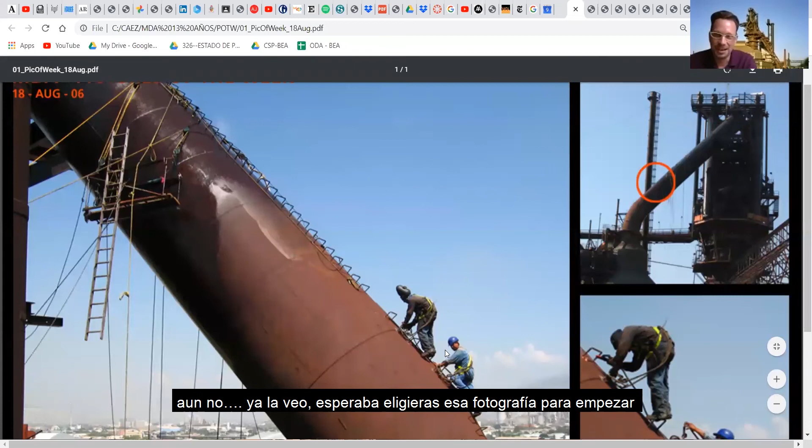So here I go. Let's start with this here. Can you see my screen there? Not yet. Yeah, there you go. I was expecting you would pull this up as the first one. Yeah, I have no plan for this, but that makes the surprise even better, right?

Do you remember this thing? Yeah, of course, right? This was early on when they started to clean the project. So right at the same time where the design that we did for the extension, for the new bits on the museum, separately had a cleaning and restoration project going to save whatever was savable from this amazing, yet unfortunately heavily deteriorated structure.

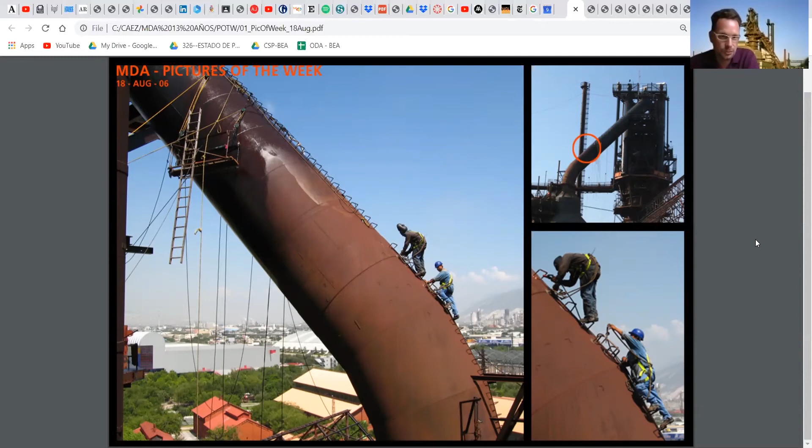And so we kept going to site regularly. And at one point we saw these quite brave men climbing up on this huge pipe that connected the blast furnace to the dust collector, from the very top of the structure going down, using the existing access ladder where not all steps were left to make their way up, probably welding on a few other ones for safe access, and then cleaning and coating the existing structure to protect it better for the years to come.

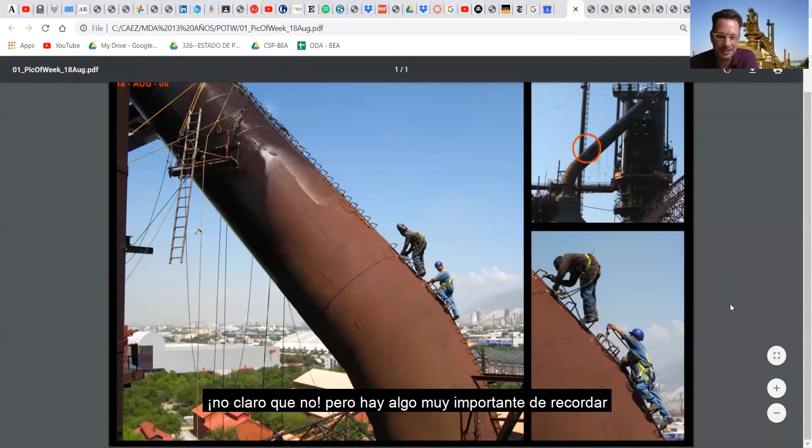Very important: none of us was as brave. No, but you were. There's something that is very important to remember, and that is that Mr. Christian here, I don't know if you lost that, but you weren't that confident on heights. Oh yeah. No, I didn't want to necessarily share this right away.

And I am going to use this tool. So if you see the yellow line here, we are at 40 meters above the ground. So even when Christian wasn't going all the way up here, we were here when this wasn't even prepared for visitors. So you're talking about how brave these guys were, and of course I completely respect that.

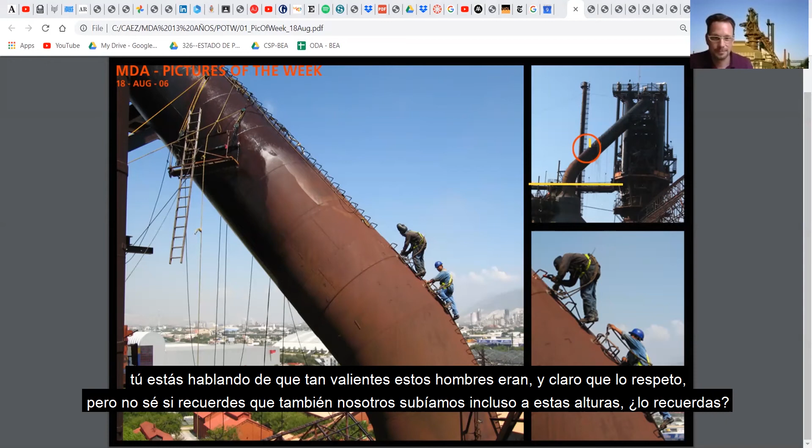But you were also a part of this. I mean, we even went to this part on the top. Do you remember? Yeah, there were steps missing on the way. Yes, and today I wouldn't do it, not at all.

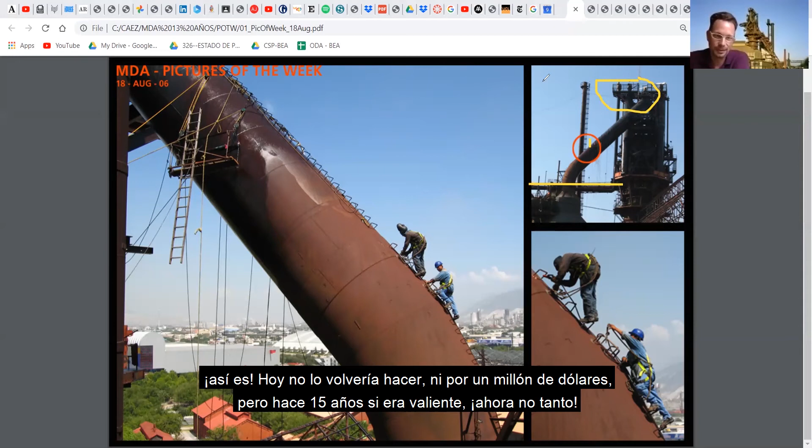For $1 million, I wouldn't do it. But 15 years ago, yeah, I was brave. Now I am not that brave anymore. There are photographs, maybe even included in here, of me doing this, and in hindsight I can't believe that I did this.

But maybe at that point we were all a bit more adventurous, and the structure had so much intrigue and mystery, but also just greatness to it. I think we all sort of felt we need to explore it. We need to make it to the very top.

Another interesting thing to notice here, if you look at the date in the image, we can see this is August of 2006. So this was just a little bit less than a year from opening day. That shows something very important to mention, that we were able to do this project in a very, very short period of time. In total, it took 2 years and 2 months. It opened in September, and we had won the commission in July.

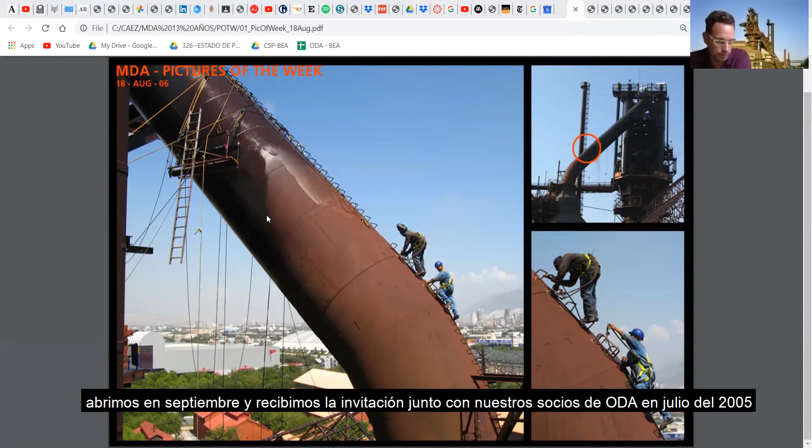Yes, and we won the commission together with you and your partners from ODA in July of 2005. And one of the first steps in construction is precisely what's shown in these pictures.

While we were detailing and developing the design, one of the first things that had to be done on site was to restore and preserve the integrity of the steel structure, but also to secure it.

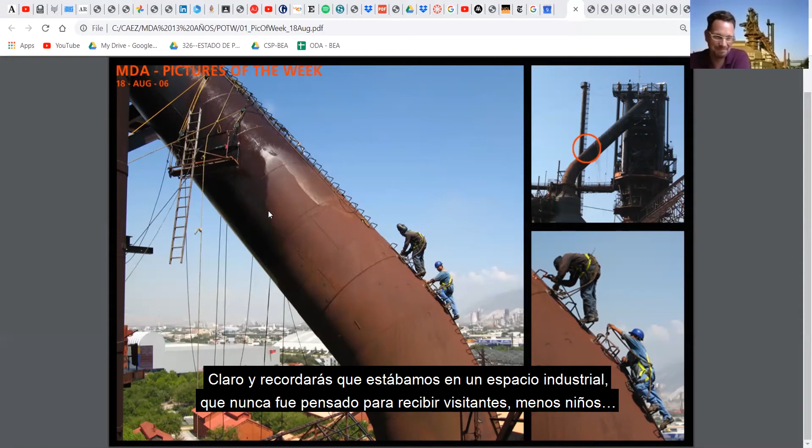Of course. You have to remember that this was an industrial installation, not intended to be visited by people or children, or crazy architects. Or crazy architects, but it happened.

You can see sort of the skeleton of the cast hall, right? So the former cladding was already taken off, even at the bottom of the main photograph.

At the beginning, when we encountered the project, the whole cladding of the cast hall was still there, but it was quite heavily deteriorated. In the beginning we thought maybe we could salvage it, take it down, and then use it again after upgrading it and adding a proper envelope, but we then learned that it was deteriorated beyond salvation.

So this all was taken off and then cleaned, and even along the way, we had to sort of change the design to adapt to the existing conditions.

I remember that at some point we had this idea that could have led to a completely different result. I guess the result is still proving to be a very good decision in terms of the system and the solution that was provided.

So I'm going to jump for the next picture. Can you see this? Yes. All right, yes.

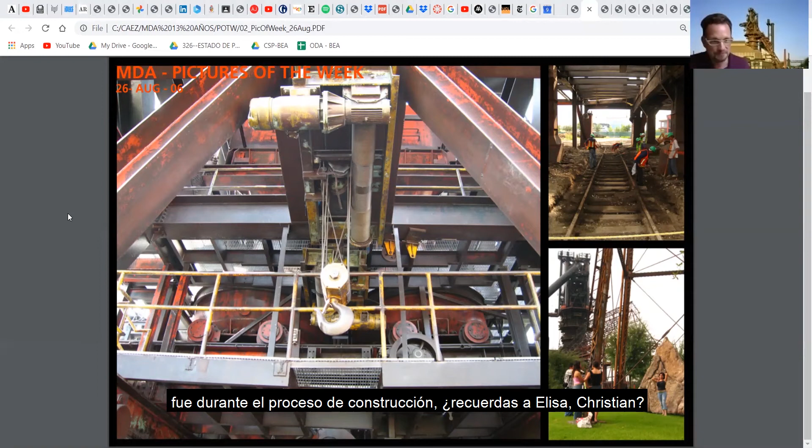Throughout the construction process, there was this — do you remember Elisa, Christian? Yeah, of course, Elisa Rubalcaba. She was, let's say, the guardian of the structure. She is a restoration architect, so her role was to provide guidance on the elements and agree with the design idea of what to do with the existing structure.

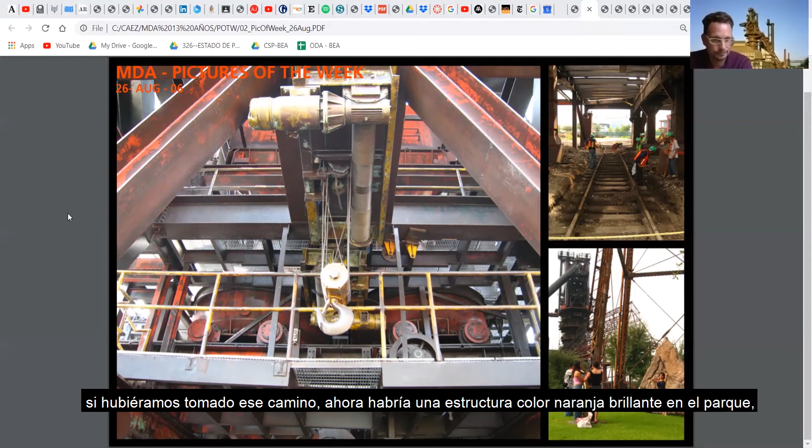That's something I always comment to the students when I take them to visit the museum — that there could have been many other ways to approach the restoration or reuse of the building. One of these approaches would have been to bring back the building to its original splendor. If we had done that, we would have a bright orange structure just sitting in the park. It definitely could have been a very different effect.

Yeah, because the original color — the photograph we are looking at is of a building with almost 20 years of operation and almost 20 years of abandonment.

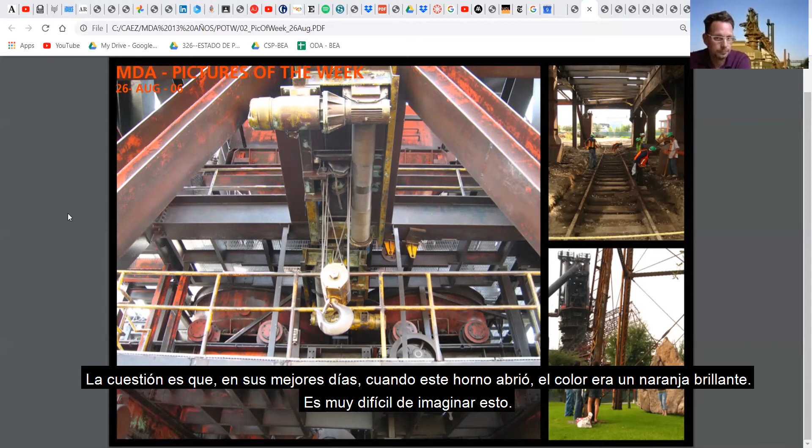But the thing is that in its best days, the day this furnace opened, it was bright orange. It's very difficult to imagine that, because there are only black and white pictures.

That brings me back to the fact that in 1968, color wasn't yet in the world, right? I mean, color was invented in the early 70s. Before that, the world was completely black and white. Well, the TV I grew up with was just black and white, so the world must have been black and white.

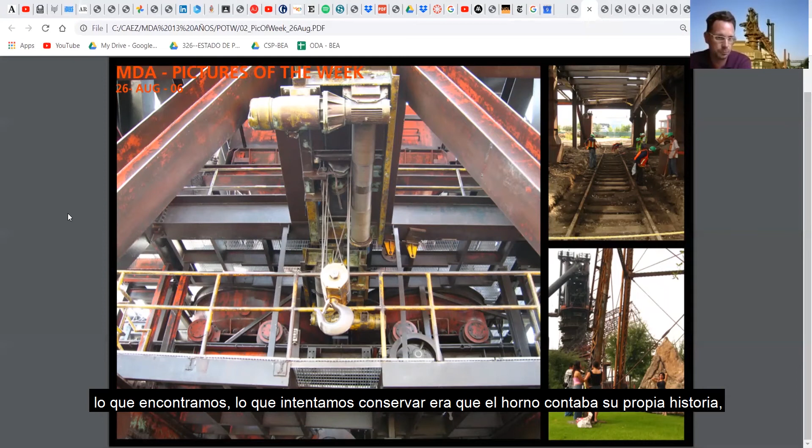But I think the path that we took, I mean if I say we, I'm not just us as the architects, but we as the project team together with the client, with Luis, with Raul, and with Elisa, took was more about preservation than restoration. What we encountered, what we found, we tried to preserve as much as possible, because it told the story of a rough industrial facility that had been 20 years in operation.

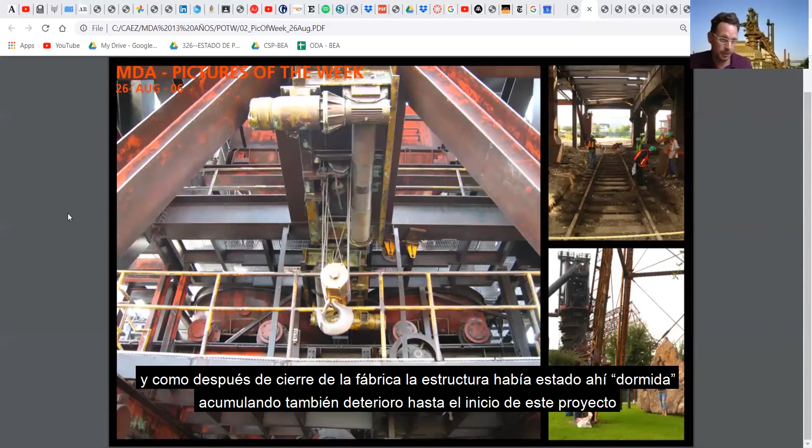During that time it had seen abuse, sheer deterioration. And then after the unfortunate closure of the steel mill, the structure was fenced off and lay dormant and deteriorated for another 20 years before this project came about. So we discovered the railroad tracks and reused that.

I think for people from Monterrey, this photograph on the bottom right is something that for us coming from New York was always a great surprise. For people in Monterrey, this is of course very common. Everyone knows this building, the park. A lot of families or parents of younger people had worked there. So though it was heavily deteriorated and had lost a lot of its initial glory, it had a very strong and fond place in the heart and minds of the people of Monterrey.

Whenever we went, we saw people there taking photographs, taking wedding photographs in front of this rusted behemoth. And this gave us a lot of inspiration, but I think also support.

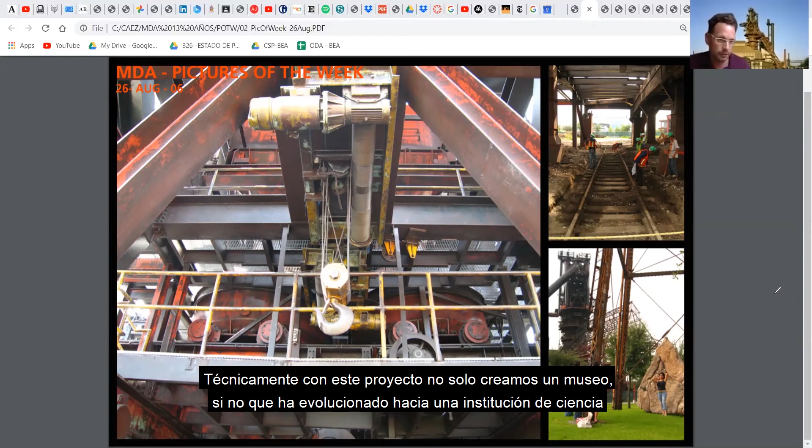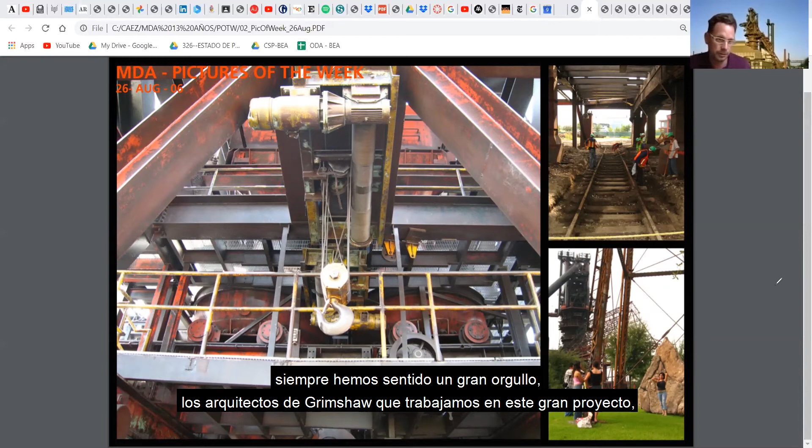To create something really unique, technically with this project, not only to create a new museum that has evolved into a science institution over this time, but to also give this back to the community, to the former steel workers and their families, the next generation, which was the lifeblood of Monterrey for such a long time, and where people that had worked there hadn't been able to go back for 20 years. That had always filled us, the architects from Grimshaw who worked on it, with great pride that we were able to participate in such a great project.

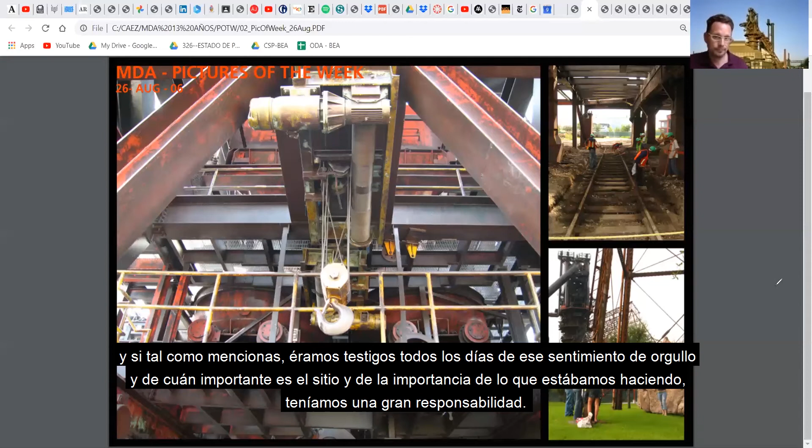As you mentioned, Christian, I think that for people from Monterrey it's a very important part of its heritage, and it's widely acknowledged as such. People are proud to visit the park, and proud to take these photographs with the building, with the industrial buildings in the background. Just as you are mentioning, we were every day witnessing how important this park is for people and what we were doing, so we felt obliged to really deliver.

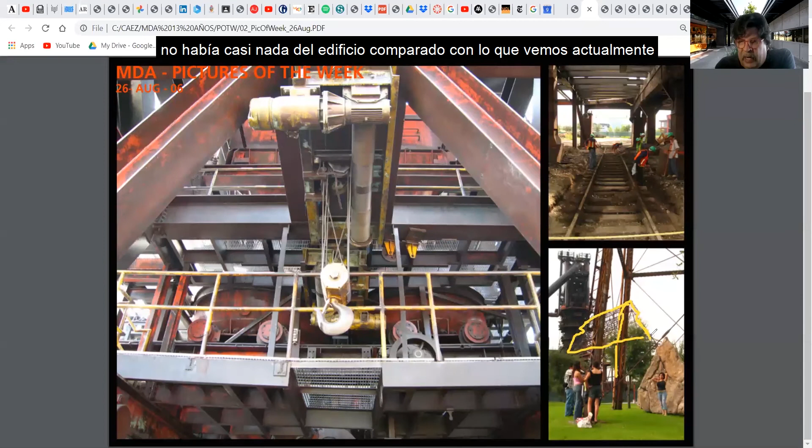Now, on the other hand, if you look at this picture, it's a very nice one, because this is what we call the cast hall, and this image is almost dematerialized. There's almost none of the presence of the building that is now there, it's very skeleton. A very interesting moment in time when this structure, which is here, wasn't still there. In order to make it, we had to make them disappear.

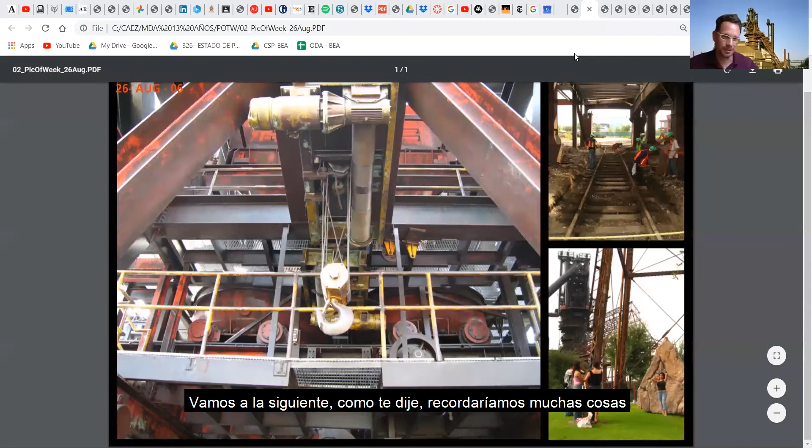Okay, I'm going to jump to the next one. I told you we were going to remember a lot of things. Oh, hello Rodrigo, is there? It's nice of you to join. Hi Christian, how are you? Very well, how are you?

Okay, Rodrigo, please introduce yourself as part of the team. Okay, in English? Everything has to be in English. We tried Japanese at the beginning. Didn't work.

I'm Rodrigo Maisterrena. I'm part of the design team for Horno 3 as part of Oficina de Arquitectura, which worked with Grimshaw from New York, with Herr Christian Hönigschmid and Carlos Estrada, and a very big team that was involved here.

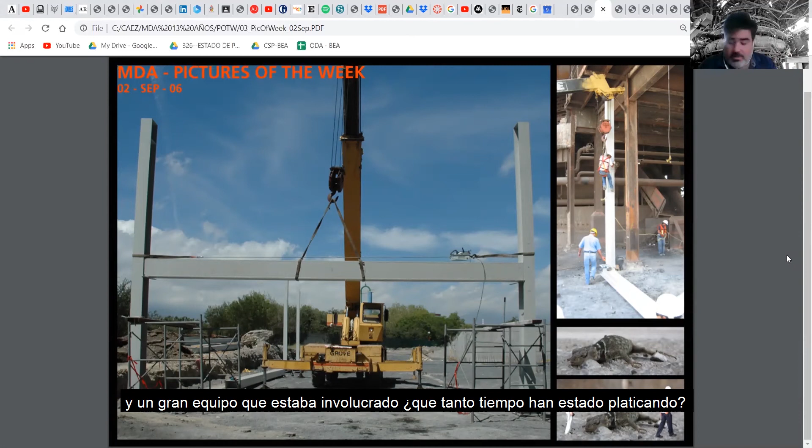Almost 15 minutes. We decided that we would just use the pictures of the week, and that the pictures would just trigger our memories. And so far it's been working very nicely, right? Yes, absolutely.

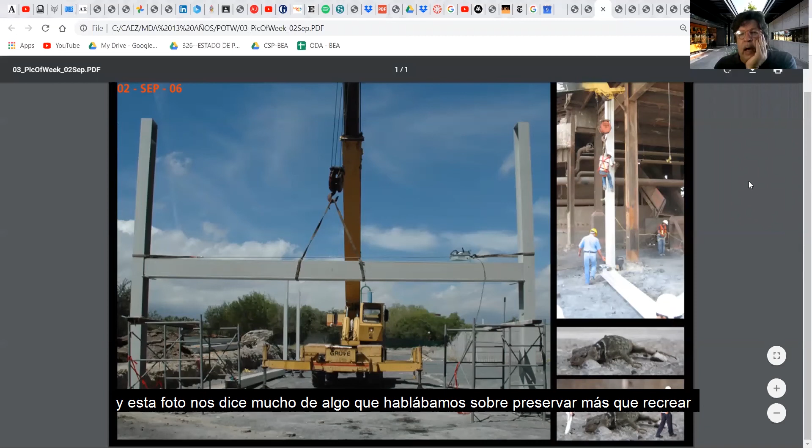So let's talk about this. I'll start with this picture on the upper right, because it tells a lot about preserving rather than restoring. This pair of columns is very important, delivering the message of what we did with the building. This is an existing column, and this is, of course, one of the columns for the new structure.

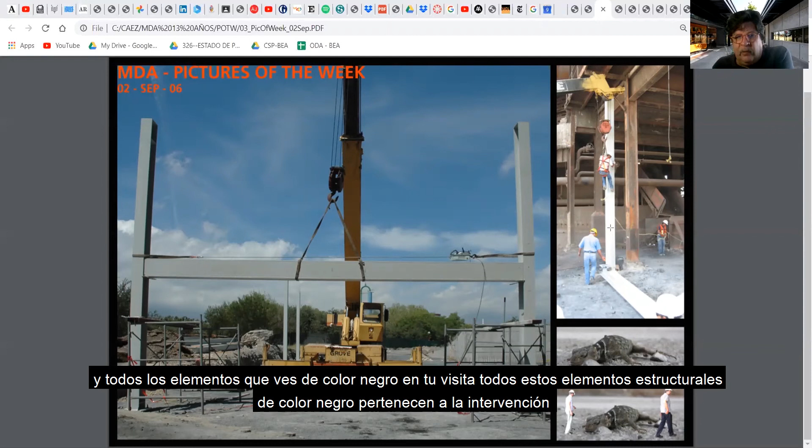And that's very important. Rodrigo and I are both professors, and we take students, at least two or four groups per semester, to the museum. For me now it's a tradition to start looking at these two columns, because this column was just installed, but in the end it was painted black. All the elements in the building which are painted black belong to the new intervention.

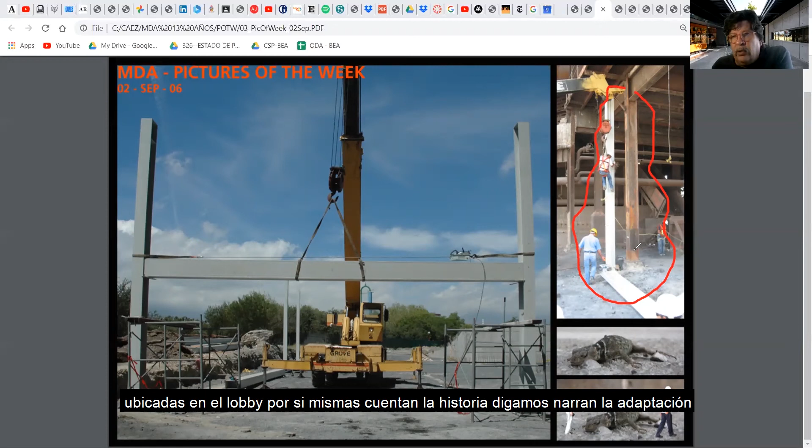So in this case, that's what we would call a happy accident, right? But these two columns in the main lobby of the building are telling the story of the intervention. It's the approach to the adaptation of the building and the respect for the existing, while making the gesture of I wouldn't say imitating, but almost repeating the structural language of the building.

So again, when all this crazy pandemic ends, please go to the building and take a look at these two columns. You'll see that this one is preserved in its orangey, deteriorated color, and this one is bright black. These two columns together, one is saying I belong to the past, and the other is saying I belong to the present and to the future.

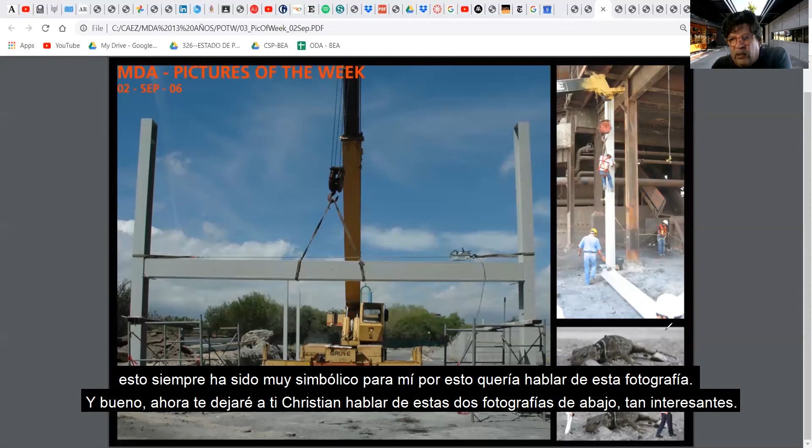That's why I wanted to talk about this picture, and I'll leave you to talk about the pictures below, Christian. These are very interesting.

Yes, as architects, I think scale is almost important, getting a sense of scale. On one of our site visits, we encountered this mysterious creature, and I thought it would be sort of humoristic, a turn on the fauna of Nuevo León, of Monterrey, to put the two of us in that picture to give a proper sense of scale of this monstrous creature that we encountered.

I was trying to feed it. I'm the person on the left, and Carlos could just not be bothered and continued with his site walk as usual. In fact, I think the person on the right is Mr. Bill Corgan. Oh, it's Bill. I thought it was you. No, it's Bill Corgan, he looked a lot fatter than myself, but that was back in the day. I don't want to be seen beside him anymore. Yeah, I was also more skinny at that point.

So Bill Corgan was the partner in charge of this project. What was his role? He is a very, very funny Englishman, and also a very brilliant architect, and it's always a pleasure to have a conversation with him.

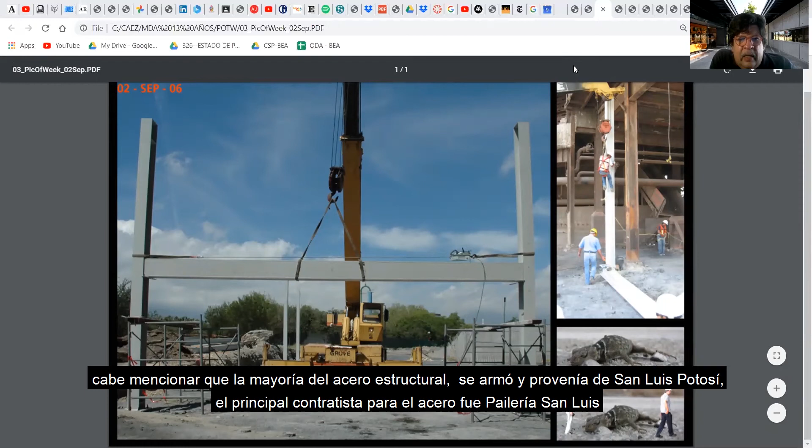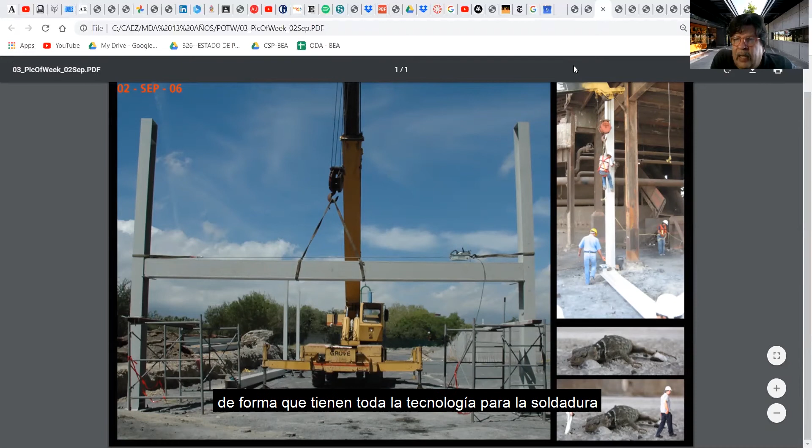Important to say that most of the steel was fabricated and brought to site from San Luis Potosí. The main contractor for the structure was Pailería San Luis, a company very well equipped for this type of job, because they are specialists in building tanks. So they have all this technology to do the welding, and in the next pictures we are going to remember some of these things, Christian.

Rodrigo, do you have anything to say about this? Not yet. Okay, very well. So I'm going to jump to the next one.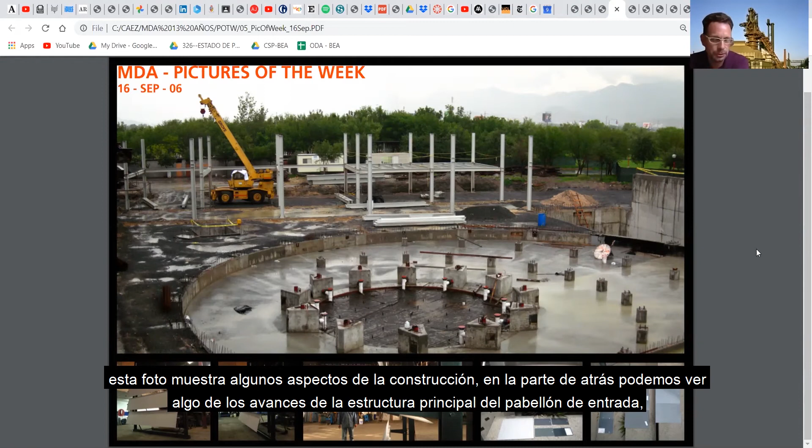This shows a few aspects of the project. In the background, we see the advancement of the steel framing of the entrance pavilion that we saw in the earlier picture - there's still the same crane continuing to erect it. In the foreground of the larger picture, we see the foundation of the steel gallery, similar to the entrance pavilion, one of the complete new buildings that we added on the west of the building, on the west of the cast hall.

You see sort of this depression there. In the end, the actual floor finish is on top, just above the top of the concrete pedestals, because we used this base underneath the floor as a plenum, through which we provided the fresh air, the ventilation for that gallery. Because we came up with a great design for the ceiling, we didn't want to put any large infrastructure, any ducts in the ceiling, so we supplied the air through the floor.

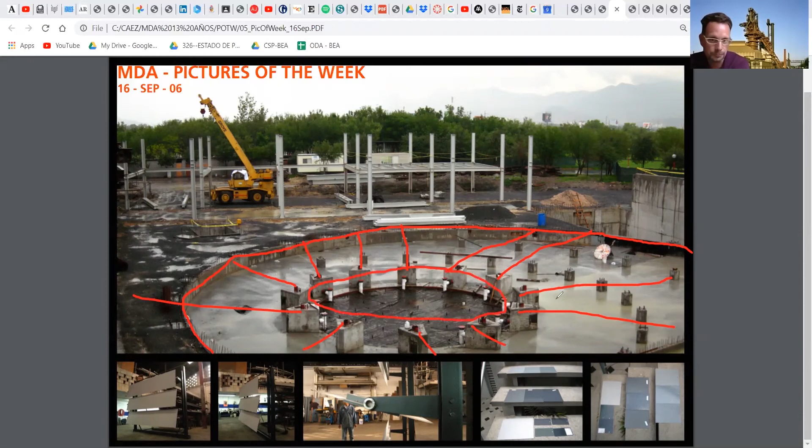You also see, at the central pedestals, white pipes sticking out. We collect the rainwater from the green roof that sits on top of the steel gallery, and we drained that through those central columns. It then went to a cistern, and it's reused on site. So already back then, we tried to implement quite a few green, let's say sustainability, design measures in the project.

In the bottom row of pictures, you see mock-ups, test installations for the cladding of the cast hall with the large panels, where we came up with the detail that allowed installation at various angles. So though in its final state these large louver panels are fixed, we created a movement across the facade by having these panels installed at slightly different angles, and over the course of the day, as the sun passes over the building, it starts to animate the facade quite nicely.

And on the right, you see a large number of color samples. The final finish was very important to us. In the background, you see one of the photographs of the completed cast hall, which has a really nice glow at sunset. This is achieved through a metallic finish on those panels, and we needed to do quite a few rounds to get exactly that color and metallic finish right.

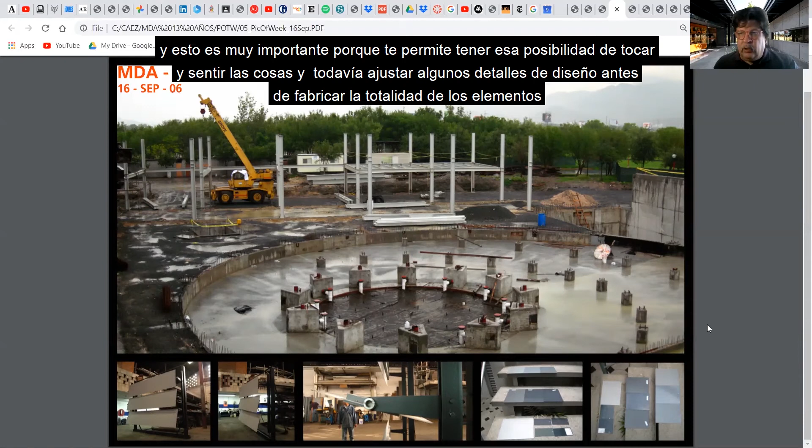In this case, I have to say that the design was very strong, and that we had a very good contractor, Hugo Schiaffino, who was the contractor for these panels as well as the yellow stair. He was very good, with a very good sensibility of detail.

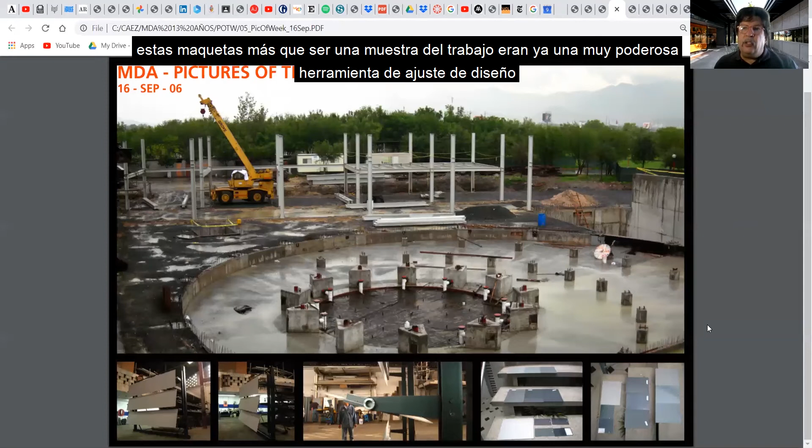So basically, when he produced these mock-ups, there was already a process of reviewing, discussing, changing, and adopting some new ideas. So these mock-ups, rather than being a sample of the work, are a very powerful design adjustment tool. I think it's very well invested money, because we could test things, test how they would perform, and not wait until they were installed. We could do this in a very controlled situation, so there were many adjustments and finer detailing that happened after we had these pieces built.

And then in the bottom right, there was... I don't think we have these photographs, but I remember that at some point we had this meeting with the construction manager about this selection of the black color for the columns. Do you remember that, Christian?

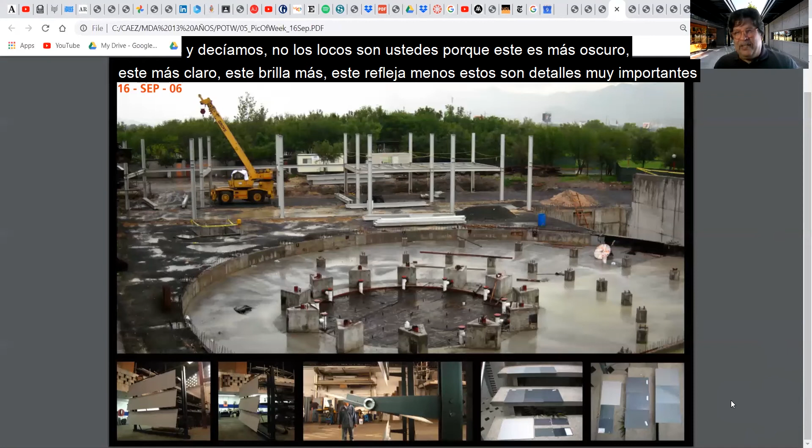So we were told from general management, guys, you are crazy, the only thing we're looking at is one black color. And we were not. You are crazy, because this is darker, this is lighter, this could be more shiny, this is less reflective. These differences are very important, and the thing was not only to have these samples, but to put them as close as we could to where they would finally be used, in order to see how they would react to the light or to the colors around them.

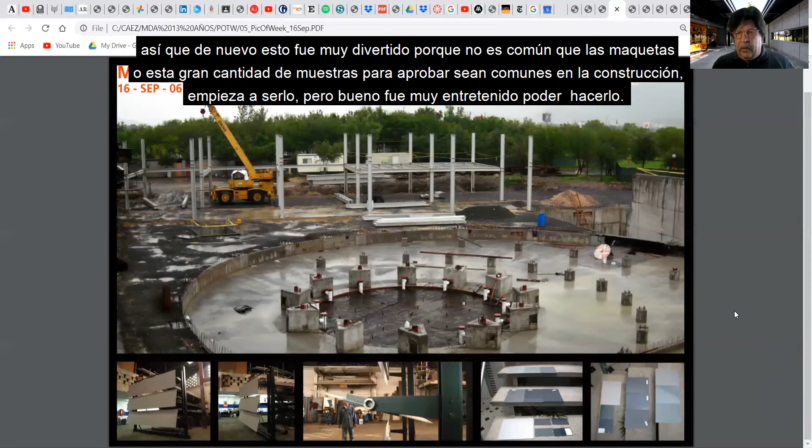So again, it was a lot of fun, because this amount of mock-ups or samples to approve isn't a very common practice in our construction industry. It's getting there, but it was a lot of fun for us.

Do you remember the RAL code of the color, Christian? No. Do you? 9011.

Okay, yes, just to add a little bit more on these pictures. On the top one, as you were mentioning, we have an elevated plenum below the floor. And I remember talking with the engineers that we didn't need any heating for this area, because since it was underground—well, not underground, we have the green roof, and it's pretty well insulated—basically in winter, the lights of the display would be enough to keep this warm, with the lights and the people.

So we didn't need any heating for this, only air conditioning for most of the time. But it was a really nice solution, something that was never done in Monterrey—I don't know about Mexico, but in Monterrey, displacement ventilation was a new thing. We had a really hard time with the local contractors trying to convince them this was the way to go. They kept telling us it would be easier, faster, and cheaper to install a conventional system, but that would involve a lot more tonnage of air conditioning, and in the long term the cost of operation would have been even bigger. So we had a long fight with that, and finally we set this, and it's been working quite well.

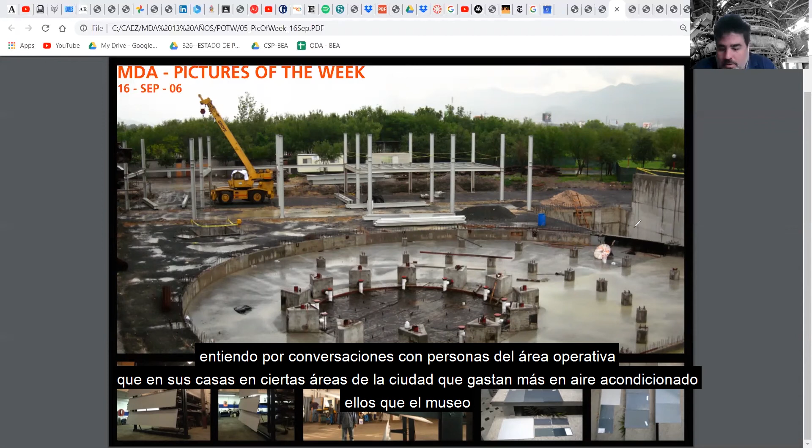I understand from conversations with people in operations that there are houses in certain areas of Monterrey that spend more energy cooling than the museum. So it's a very good system, the one that was implemented.

Just to take that note, the air conditioning equipment is sitting right here in this basement, and this opening you're looking at here is the entrance for some ducts which go like this—you don't have to take the duct all the way to the outlet. So the ducts are here, and then the whole space operates as an enclosed chamber, what we call a plenum, and there are openings on the floor from where the air conditioning just goes up. As you can see, I've become a master in drawing with annotate from Zoom.

Another note on the louvers: there was a discussion in a meeting about having those electrically operated so they could move, using the DMX system that was going to be used for the show, which could control little actuators to move the louvers. But there were around 1,300 motors that would need to be installed, plus the cabling and control, etc. So that idea lasted just about 5 minutes of discussion, and we decided we'll move those louvers manually once a year, so that they change the appearance.

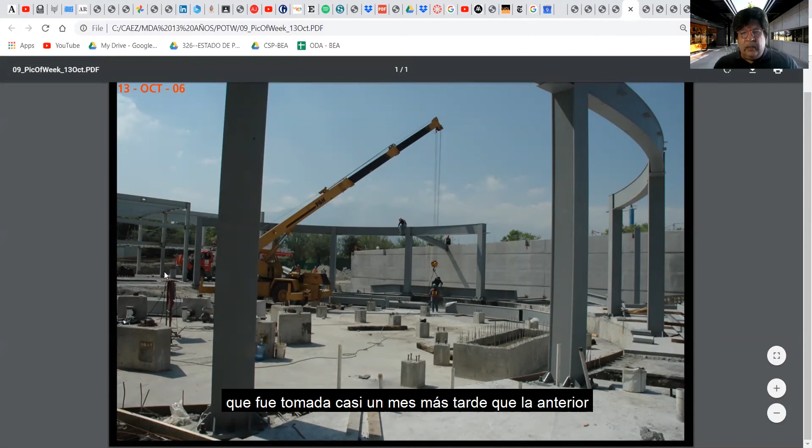This is maybe a month later than the last one, and of course they're mounting the outer ring of the roof. This is pretty much standard steel structure.

Some of the pieces you're looking at in this image are part of the exhibition inside, which we have to mention was made by Aldrich Pears, a firm from Canada who are specialists in this type of project.

We had a very good collaboration with them. I think it was a very interesting process, since we had to compromise some of the ideas they had envisioned for the visitors' experience, and we wanted the building to also be part of this visitor experience. So there were constant negotiations with them, and I guess they were also intelligent enough to understand the value of the building. Of course there were some other things we weren't really in agreement on, but we always found a way of dealing with them.

For example, this thing here - I don't know if you, Rodrigo, or Christian, remember what this is. It's for a set of rollers, on the floor, and the idea is to exhibit.

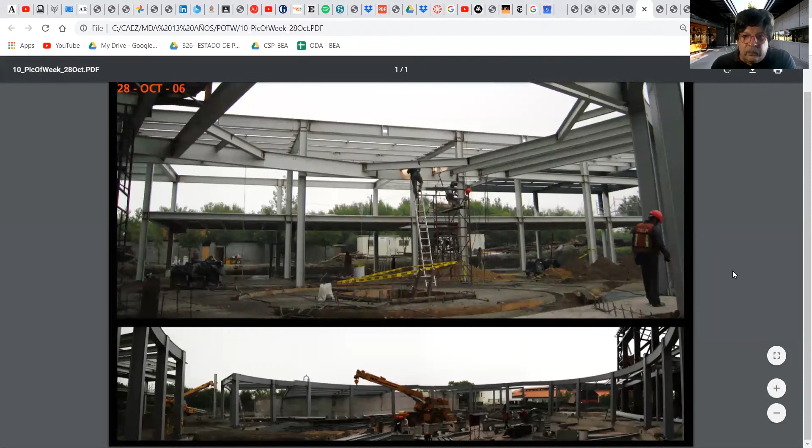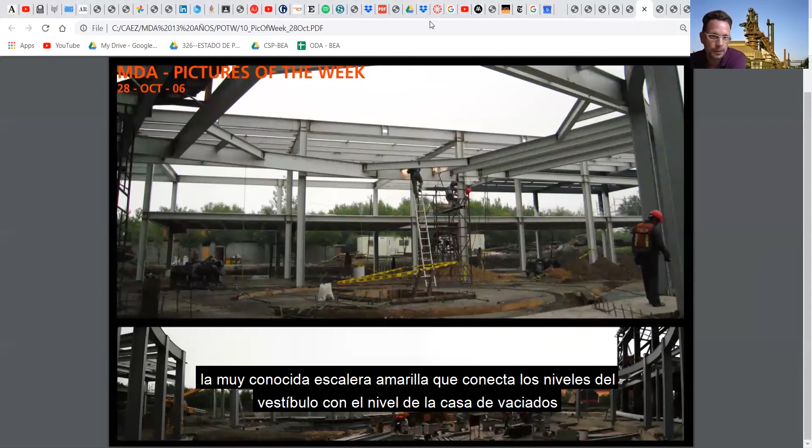It sort of looks like two circular spaces for the stair. In the upper space, eventually the stair would sit—the well-known, beloved yellow stair that connects the ground floor to the main upper floor, the level of the cast hall. The white structure is the level of the roof.

On the bottom, this is more of a panoramic shot so it's slightly distorted, showing the circular space of the already much discussed steel gallery with the plenum floor, where now almost all the steel structure is complete. Most of the steel structure in the end is hidden, and the key architectural features of the stair and the tessellated roof of the steel gallery's steel structure are not there yet. So this is still just the skeleton of the future building, of which not much in the end is visible.

Important to notice here again, take a look—this is just two weeks later than the last one. We started this conversation by saying the building, we as a team, did this project in a little bit more than 2 years, from design and construction, which meant construction was happening really, really fast, and that required a lot of attention from ourselves. It's a lot of fun, but also a lot of stress, because things are on a clock, and the clock is moving fast.

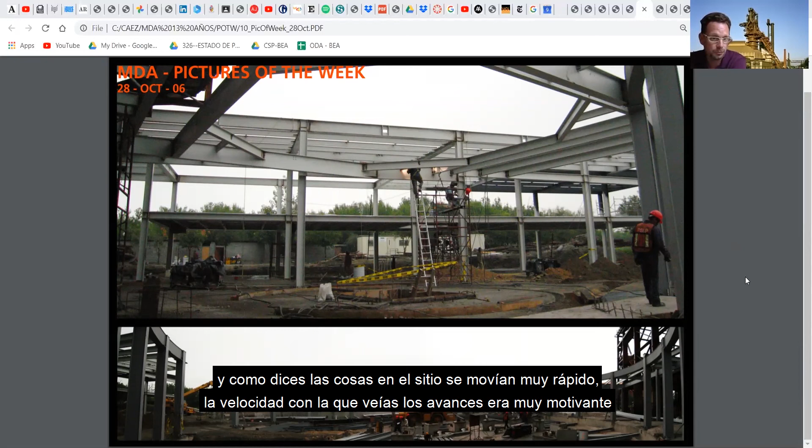I think a lot of us put a lot of love and blood and sweat in, plus of course a lot of extra hours. So I keep saying yes, this project was completed in 2 years and 2 months, but I feel like I worked 4 years on it. But I felt every day was worth it. And once it was inside, it kept moving really fast, so the progress we could see at a great pace was really, really encouraging. It was a fast track within a fast track.

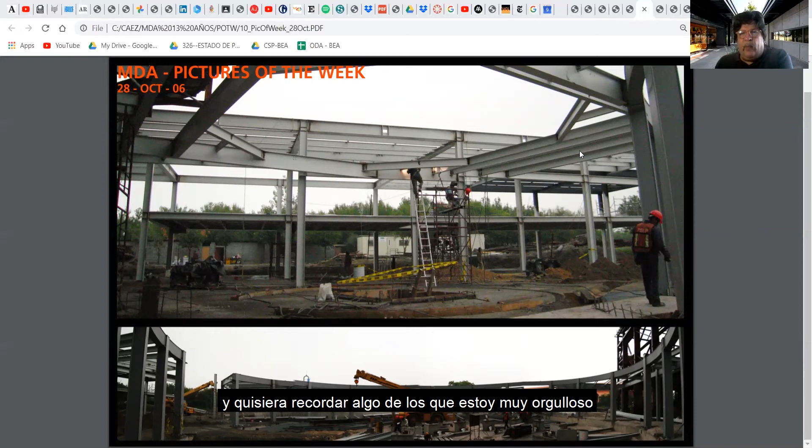Very important to notice, now that Rodrigo said you have to choose your battles—in this case, the structure we're looking at in the foreground is the very basic structure for the steel gallery, and we knew it wasn't going to be visible. We have to remember, and we're very proud of this, the building was done in a very short period of time, but it was also done on budget, which meant we didn't get crazy with crazy architectural ideas. We knew we had to invest very wisely where we wanted the nice features of the building, and elsewhere we would just use very simple and standard steel construction details and types.

I think that's one of the most important lessons for us—we had to be sure to select the right things where we could really put all the eggs, as we say here in Mexico, and then make the rest in the most economical way possible. I'm going to jump to the next one. Yes, let's look at the next one.

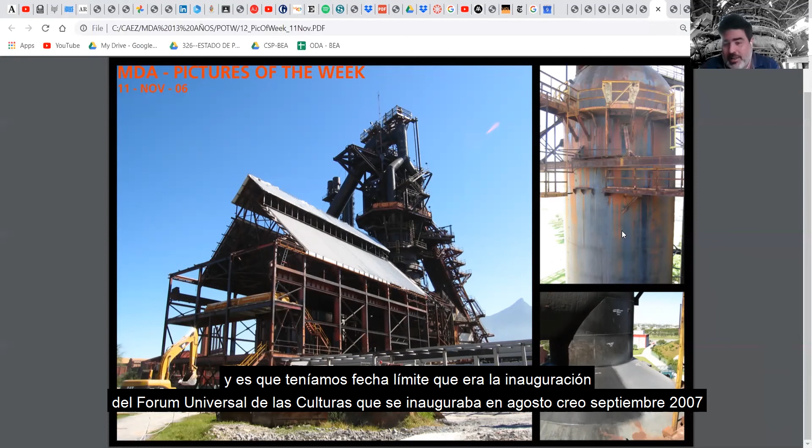I'm remembering a talk with, I believe, David Langdon, who mentioned that typically a museum takes from 4 to 6 years from conception and design to construction, at least, and we were doing all of this in 2 years. He was quite impressed with what we wanted to achieve in time, because we had a deadline before the forum—we had to finish before the forum, which was, I believe, in August or September, and we wanted to have our soft opening and training before that, so everything was running smooth for the forum.

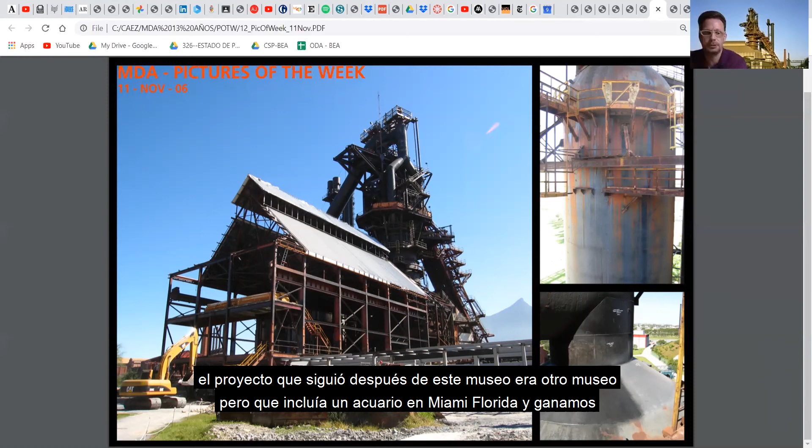Just a question, Christian—how long did it take to do the Frost aquarium you were involved with, just recently inaugurated? The project I did after this museum was another museum which also included an aquarium, this one in Miami, Florida. We won this competition a few months before our beloved Museo de Acero was completed, and we worked on this just a couple of months shy of 10 years—5 times as long as Museo de Acero. It's another scale and level of detail also on finishes, but something like this requires a lot of planning, work, and coordination.

So what we can see here is the cast hall. The skeleton, the original structure, had already been cleaned and protected—you can make out some of the original orange paint on the large columns. The new roof cladding is going in, so it's taking on again a more volumetric expression rather than the sort of naked skeleton.

On the right side, we can see one of the stoves on top, still in its original heavily deteriorated status. And on the bottom, the testing of a few coatings, might be on top of the dust collector, or one of the other smaller ones. Right, you can see the white text—we tested, I think, at least those three.

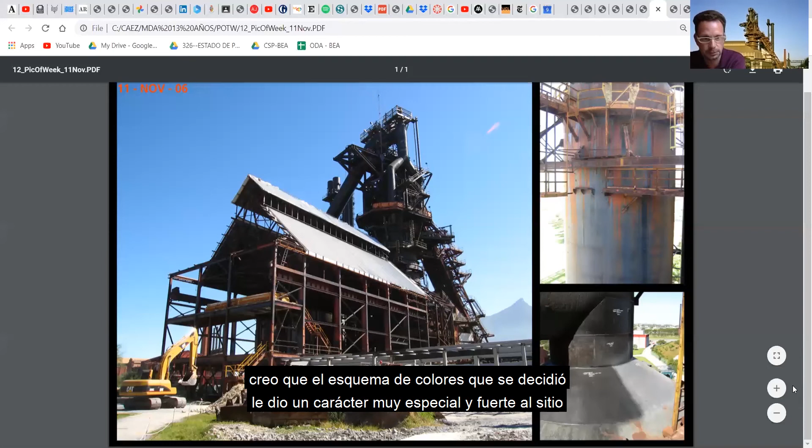You clearly see there's a strong difference between the original unprotected one and the new. But I think in the end, it was about finding a compromise—Carlos and Rodrigo mentioned compromises we agreed on with the exhibit designers, and here it was also a compromise on what product we would use. But I think the final coating we selected lent a quite strong character to the facility.

The thing is, we have witnessed that the sun here in Monterrey is unforgiving, and it just eats up whatever coating you apply. It's really aggressive and it burns—even when you have a building just recently painted, in a couple of months the sun can make it look very, very different.

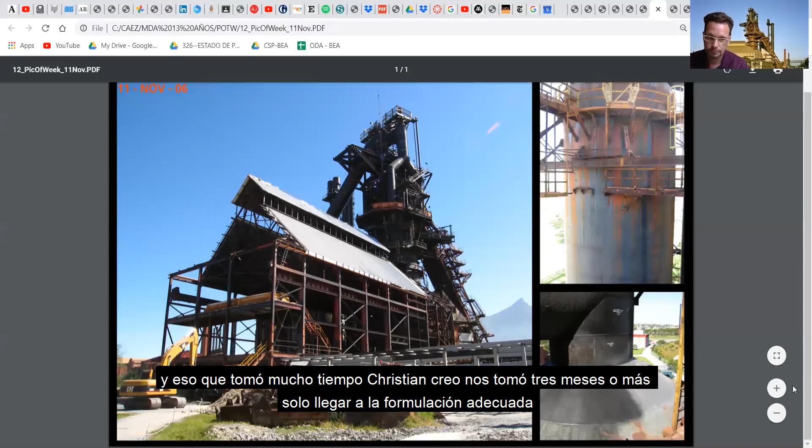I guess one of the most correct decisions we made in this project was, and it took a while, Christian—I think it took like three months or so just to get the right formulation for the finishing of the paint. And again, there were these endless conversations about why are you taking that long to select this, and we have been proven right.

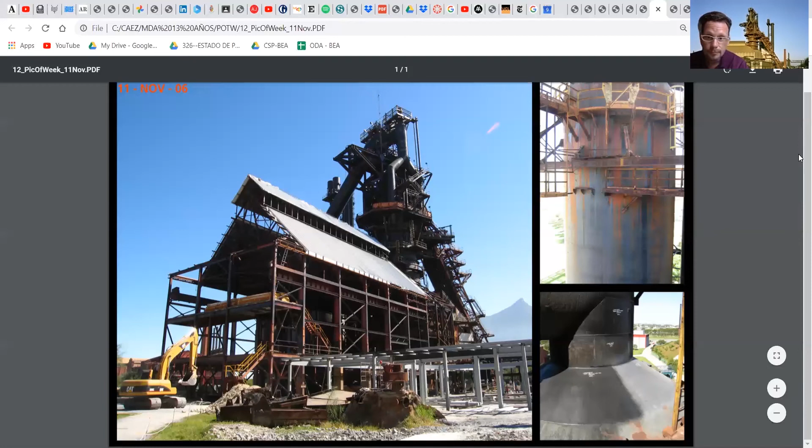I just noticed in this photograph that we can see a comet here. Can you see this? Yeah, my goodness, I wasn't aware. It's either a UFO or a comet. Just in time for Christmas. Yeah, maybe Santa.

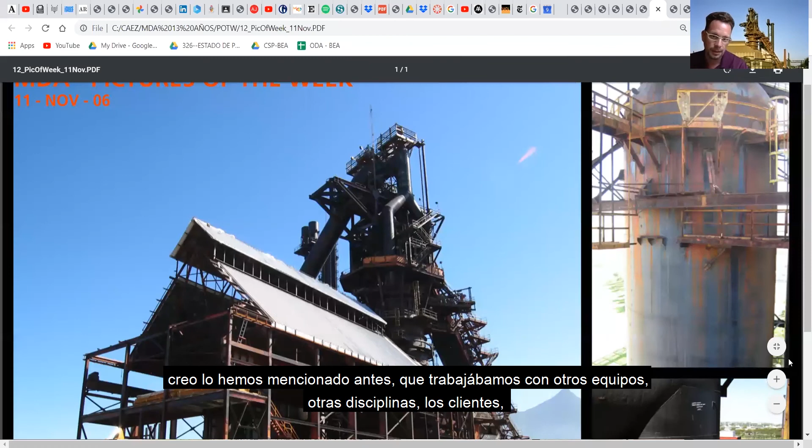We mentioned this already, that we worked with other teams, and of course we had in certain cases discussions with the client. We did not necessarily agree on everything at the beginning, but we always felt, in the long run, that the client really supported us, because we had this common goal, and they gave us the room to test out these things that, as you mentioned, in certain cases took not just a few days or weeks, but even months. But we had collectively, also with the construction manager team, planned this well, in order to have the time to test these things.

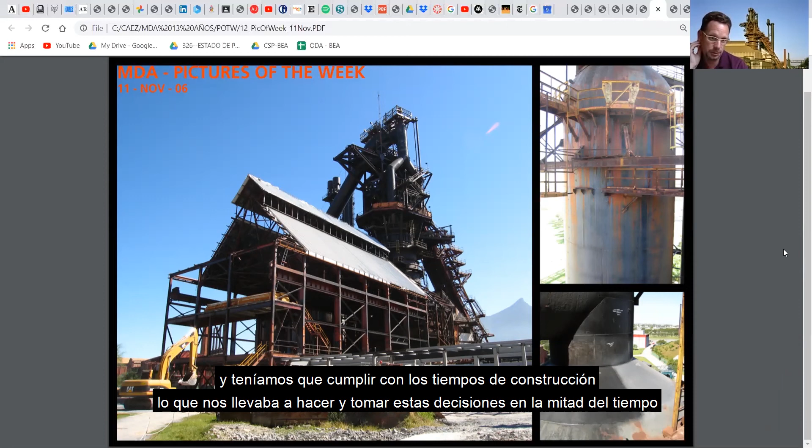Absolutely, let's move to the next one. One of the things we were testing, if you remember—this is again the entrance hall, now with its roof being put on. What you see on the left hand is the second floor of this entrance pavilion. At some point these spaces were used as classrooms, then offices, then storage.

And that leads me to this idea: these days we are living in now, where buildings must prove themselves flexible enough to adapt for change. I think one story of success for this building, Christian, is that so far it has been able to adapt to many things. Just as we were discussing before starting this recording, the institution has been alive and thriving for the last 13 years.

I guess one of the secrets for its success is that it has a building, a facility that allows for change to accommodate. And I guess in a way it's a good sign for the future, because I know hard times are coming for museums or cultural spaces that can't really move or do much about how these spaces are used.

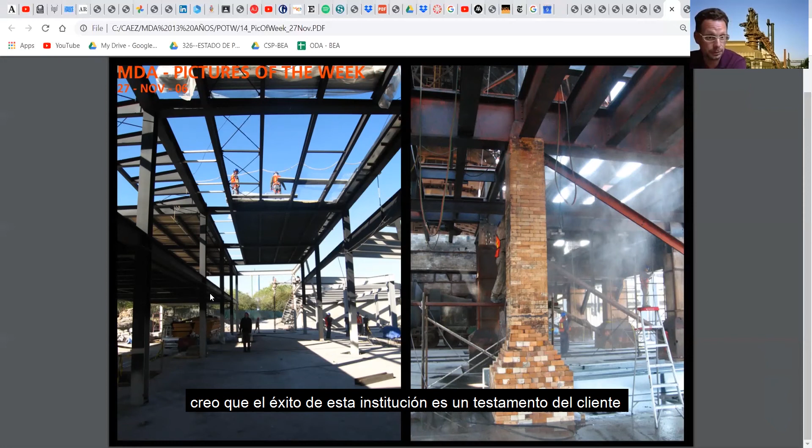I think the best projects, if designed well, provide this, if you have the right architects and engineers on it. But I think the success of the institution is also a testament to the client, to the institution, how they have been evolving, reinventing themselves, adding spaces, adding programs to the building, growing their community outreach program.

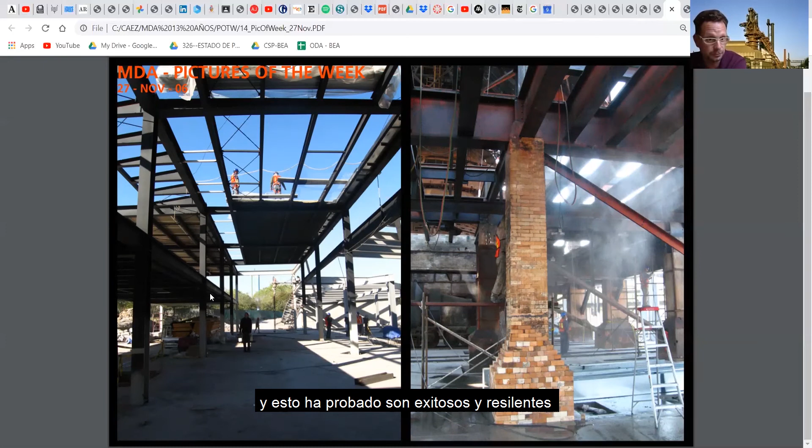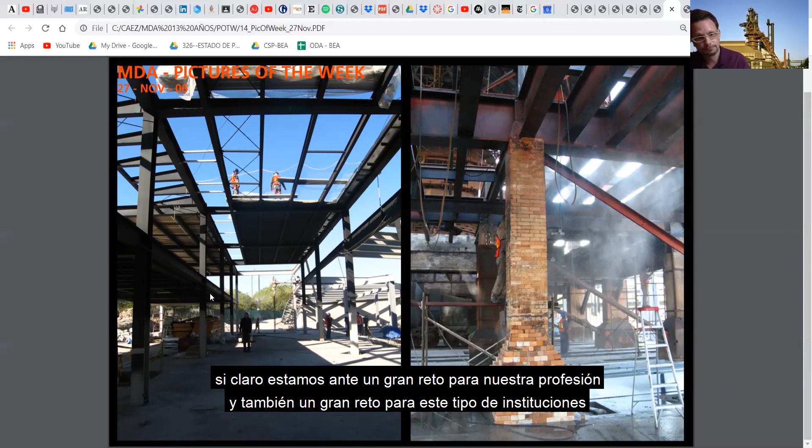And with that have proven very successful, I think also resilient in earlier, maybe problematic phases for a museum. After the initial opening, after 3-4 years, a lot of museums suffer from a drop of visitation numbers. I understand that this museum always exceeded their expectations, not only in the first few years, but after 10 years, with great excitement. So I think we all hope that we architects in our business, but also this institution, weathers this current crisis and comes out stronger. I think it's a very good challenge for the profession, and also for these type of institutions.

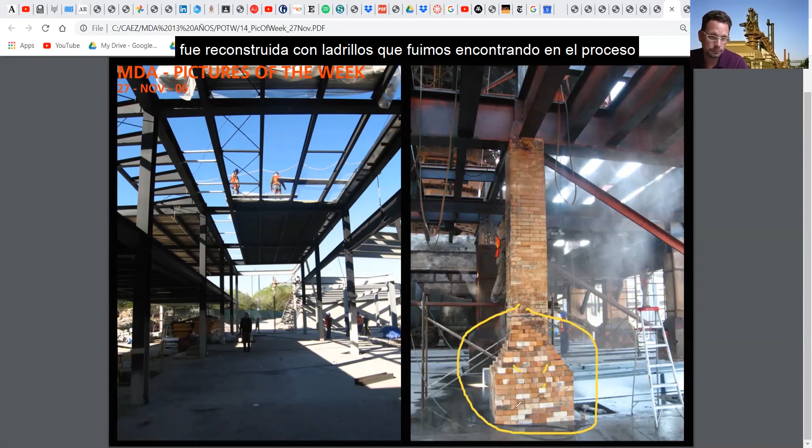The image on the right is about a more classical approach to restoration. In this case, the bottom part of the column you're looking at here is reconstructed with bricks that we found all over the place. We salvaged like 3,000 or 4,000 bricks which were part of the process, and very early in the design we decided that the best idea was to keep all the materials coming from the construction site, because we could find a way to use them.

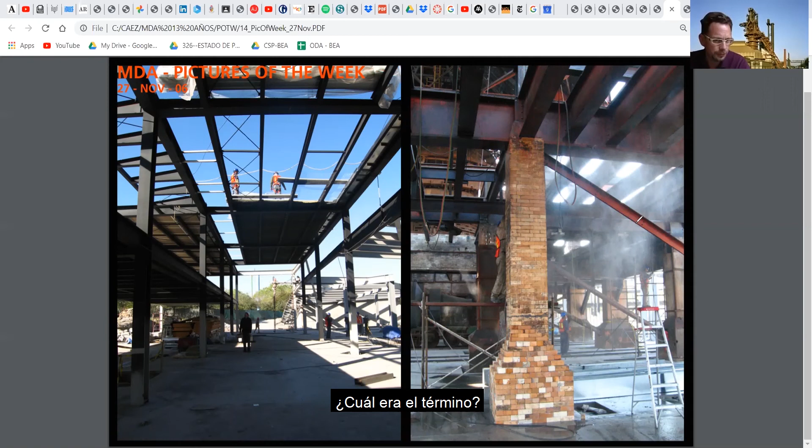And they were not just regular bricks. They were high-fired refractory bricks that had enclosed those steel columns during the operation of the building, being a blast furnace, with really hot molten steel flowing through it. So to protect the steel structure, which could at some point technically melt or deform, to protect it from the heat of the industrial process, they used these special bricks fired at a very high temperature, much higher than usual bricks.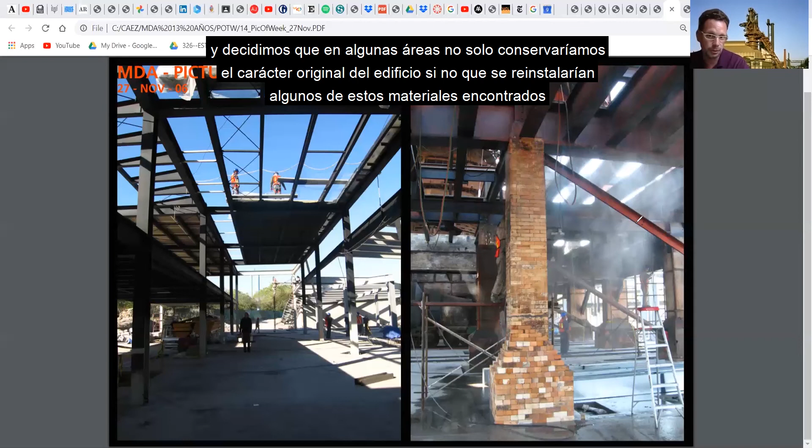So they protected the building from the heat during operation. We then reinstated them in certain places, not only to maintain but reinstate the original character, but also to serve a new purpose as fire protection for the columns. So again, we could do something great for the new function of the building with the existing materials we found on site.

Can you hear me? You have to speak louder.

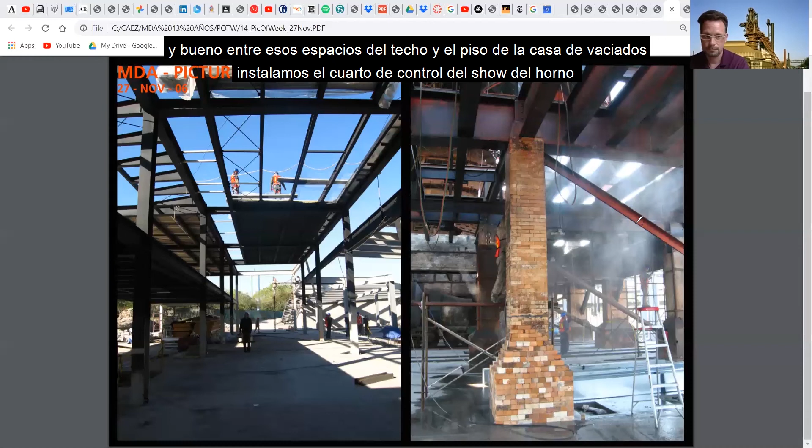If you remember, all of this was kind of like this area, especially the cast hall on the ground floor and the level above. It was like digging Pompeii, taking off layers of materials that we were finding. First the sand, then there was this brick layer where they did the canals for the flow of the iron, and between this brick floor and the bottom of the slab, there was in certain places around 1.5 to almost 2 meters of sand, all used to protect the structure below from the heat. Later on, in that space we found between the floor and the ceiling, we placed the control room for the show. You can walk standing on the roof of the first floor, but it was actually the floor of the casting hall.

We were finding things along our excavation, so it was a remembrance of how it was in Pompeii when they found it, taking off layers and layers of sand and ash. It was quite interesting.

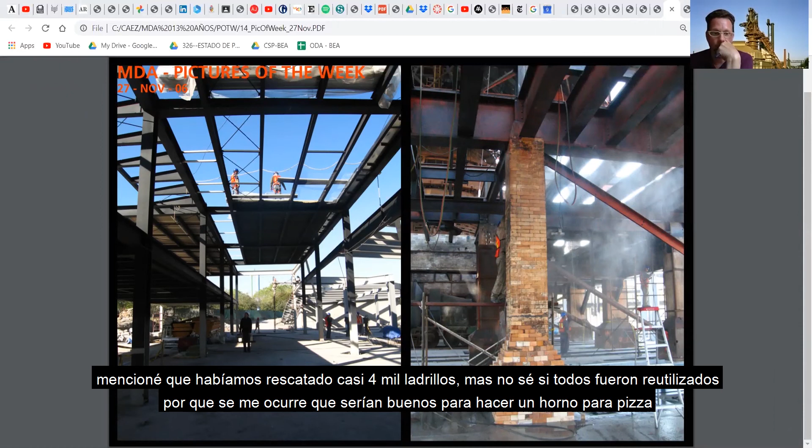I mentioned that we recovered like 4,000 bricks, but I don't think we used them all, Christian. So I'm going to ask if they have them, because these are great for pizza ovens. Were they not used in the restaurant? I don't know, I don't think so. But this type of brick can resist and hold a very high temperature for a long time, so it's ideal for a pizza oven. I will ask, check with Luis. I mean, we deserve it.

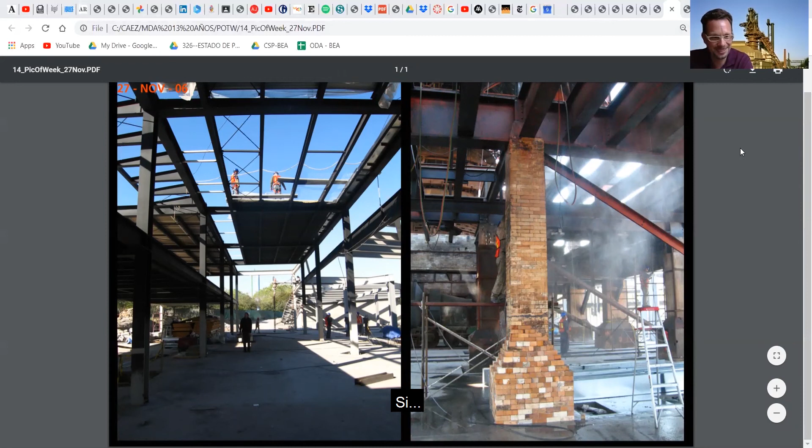Next, the last one. There are like 6 or 7, well, 8 images here. So it's the last 8 images we are going to talk about. So, Mr. Christian.

Wow, so this is a range of things, right? The largest one is probably from the main level of the blast furnace, which is in and of itself the tallest structure right behind me here.

Looking down at the new portions, right? But yeah, this was earlier, exactly. So the steel structure has just started to get erected for the entrance pavilion. There's no steel structure yet for the steel gallery in place.

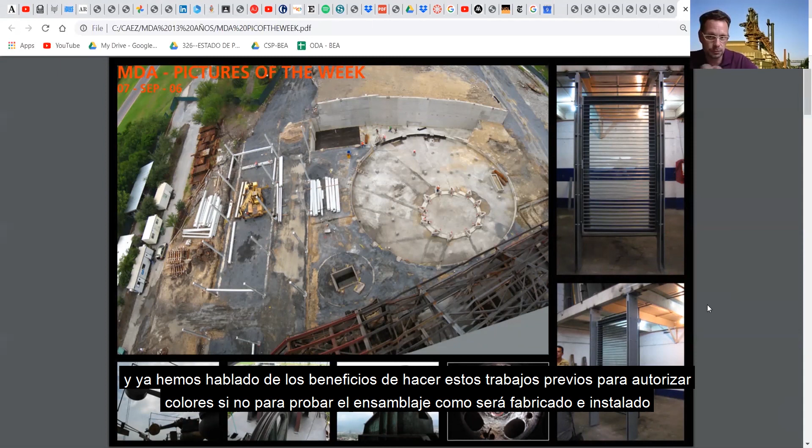On the right, we see again photographs of mock-ups of examples that we built for the glass facade. Carlos already talked at length about the benefit of testing assembly ideas, not only to decide on a color, but to test the assembly, how it is fabricated, how it is installed, right? How this all in aggregate looks and performs.

We had to enclose the original cast hall — large parts of this facility were open to the environment. They were maybe covered to protect areas from rain, but to ensure ventilation, a lot of these spaces were open. So we needed to enclose a lot of area.

While the cast hall became a black box to be able to house the special effects furnace show, the lower areas were enclosed in a glass facade. But as Carlos mentioned, the light intensity in Monterrey at that latitude is very high — around 5 to 8 times higher than in New York. So this was very different for us to work with, first as architects from New York, from Central Europe.

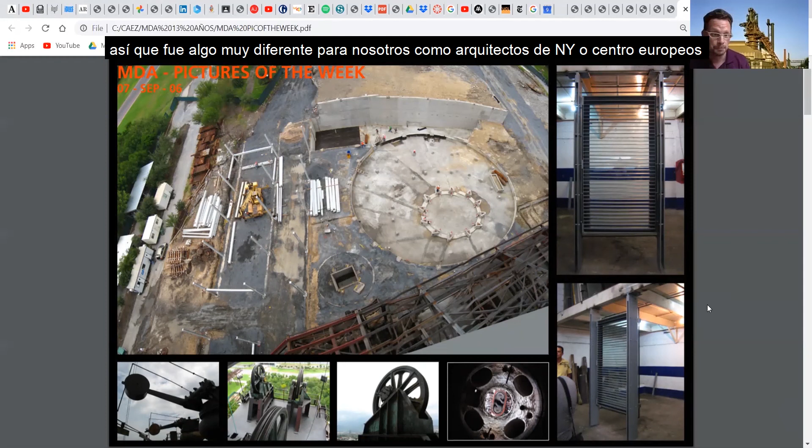So it's as important to bring daylight into the building as it is to shade the space, to at least reduce the light intensity, or as we call it, the glare. So you look here at the exterior of the facade with the glass on the rear side and a louver screen on the outside. The idea is you work with a kit of parts with a limited number of components that can be repeated to accommodate various conditions of the existing fabric.

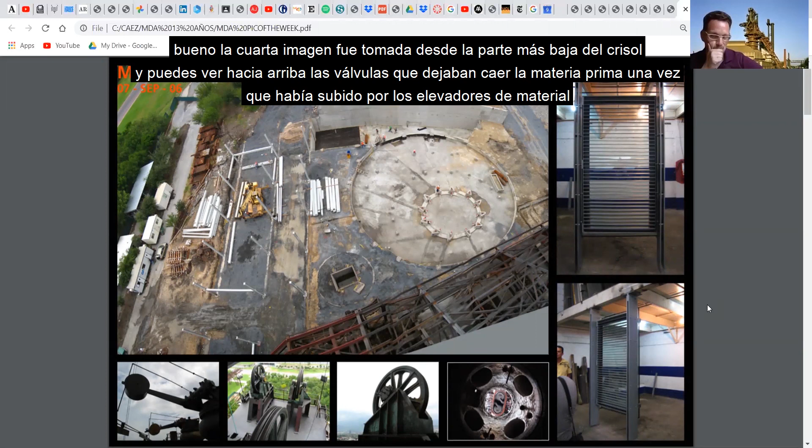I don't know, Carlos, maybe — well, Rodrigo, you, since you have the blast furnace in the background, do you want to talk about the fourth image from the bottom row? Well, the fourth image looks from the bottom of the blast furnace to the top, and you can see a set of valves that let in the material when it was carried all the way to the top.

Now we had access to tour of the furnace due to what we call a happy accident, where basically when the furnace was closed, the fire was doused by putting in thousands and thousands of tons of coal. It's like when you're starting a fire for a barbecue and you put too much of something and you just kill the fire — that's how they killed that fire. So the security specialist said that since in the show we were going to be using fire and sparks, there was a high probability that we could restart the furnace with all that coal within it.

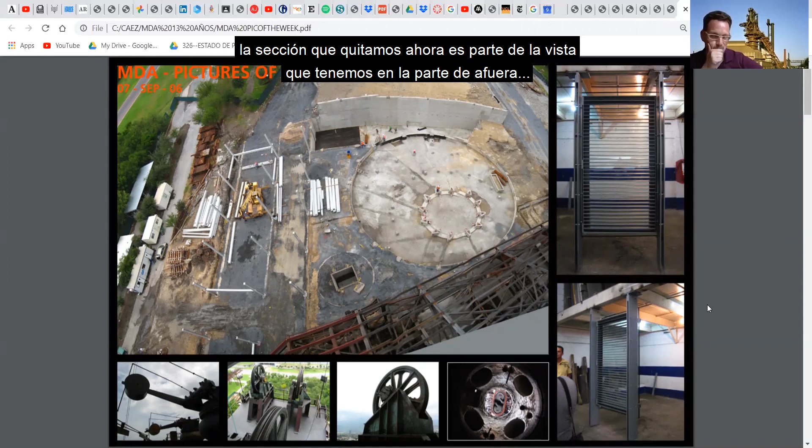So we had to open the side of the furnace. We evaluated if it could be done from the top, so that we didn't need to touch the furnace, but it was easier to make a hole on the side, and that's how you can get into the furnace now. The section taken out from the side is now part of the landscape on the outside, and I believe it's the only furnace you can go into as a tourist or guest and see how it works.

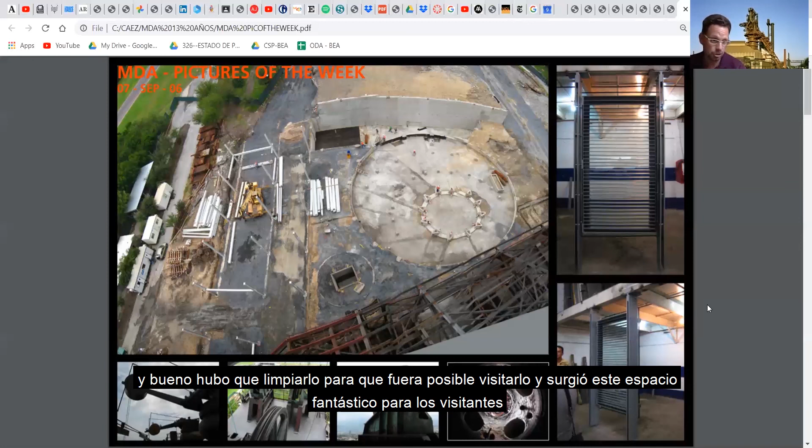But the space is really impressive — it's really impressive, almost something, it feels like an industrial cathedral. It's a very unique space, and as Rodrigo said, it was a happy discovery. We did not intend to make the interior of the blast furnace, this big cylindrical element, part of the museum story accessible to visitors. But then we needed to clean it, and we had this fantastic space, so along the way we adjusted our design to allow visitors to experience this unique space, which of course was inaccessible during the operation of the facility.

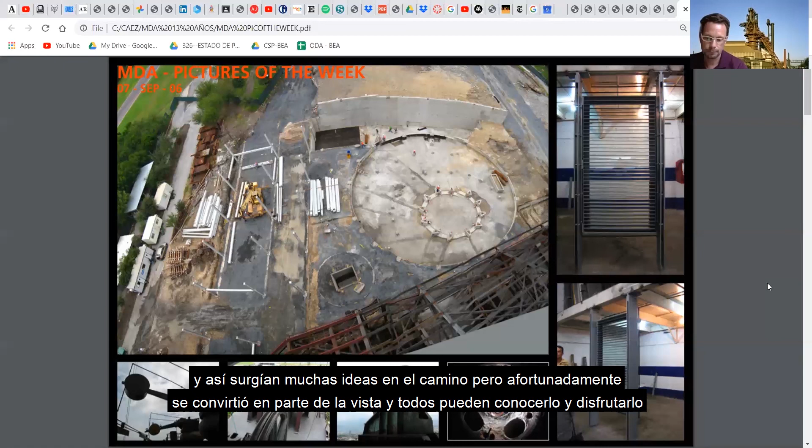Once we got that space—if you remember, the show area was just for shows at the beginning, nothing else. As architects, we proposed it be used for other things, for concerts, weddings, conferences, and so on, since we recover basically all the cast house for different events. People started having ideas: that area could be the bridal room for the bride, another said it could be full of wine. There were a lot of ideas people just threw in, but thankfully it's just a space anyone can go in and appreciate.

Very good. Moving on to the next one, the last one of our series, and I guess it's a nice one. The picture complies a lot with what we've been discussing during this very nice chat, and I think there's a lot to be discussed. Maybe next year we can continue this conversation, but I guess it's just like the last piece of the pie.

We were very happy to work with this very impressive structure, with this space, which has become a very important part of the life of Monterrey. It was a very good opportunity to learn about construction, about design, about how things are done. The most important part is having had the experience of working with a very talented team, and having worked with a very good client who is still very much interested in our collaboration as part of having this building as successful as it is.

So, Christian, can you just share with us some last words about this very nice chat we had shared this Sunday?

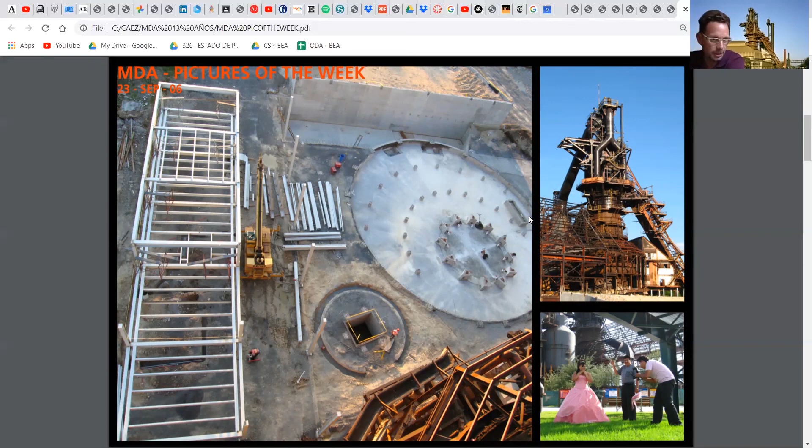Years after we completed this museum, I still hear other people fondly talking about the project, the great time they had working on this. It was a team of international designers and engineers, a lot based in New York, but even in Europe. And it was a special project.

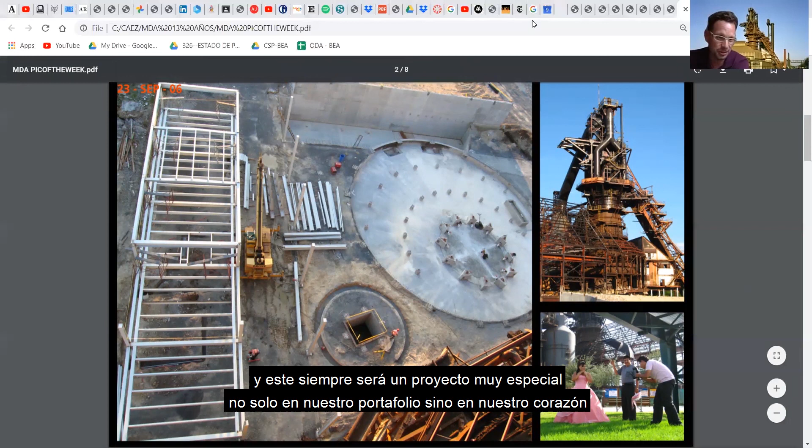I think we'll always keep it a special project in our portfolio, but also in our hearts. From the first time we came there, we were greeted with amazing hospitality, not only from you guys, but the client—shown around great places, great restaurants, great tequila bars in Monterrey. I came to learn and love the country to this day. I love tequila and mezcal and Mexican cuisine, which is so much richer and more amazing than I think a lot of people outside of Mexico realize.

I love coming back. The client invited us to come give a lecture at the 10th year anniversary, something I never experienced and probably never will experience again in my architectural career. Having completed such a project with such a grateful client is something very unique and special, and I consider myself lucky it happened once. It might happen another time, but yeah, there's so much special about the project, about the people who worked on it, who we worked with.

Even 13 years later, we fondly remember great anecdotes and stories. So I hope the institution weathers the current crisis, and maybe in another 13 years, all of us with more gray hair might still remember some anecdotes which we hadn't shared with anyone else before.